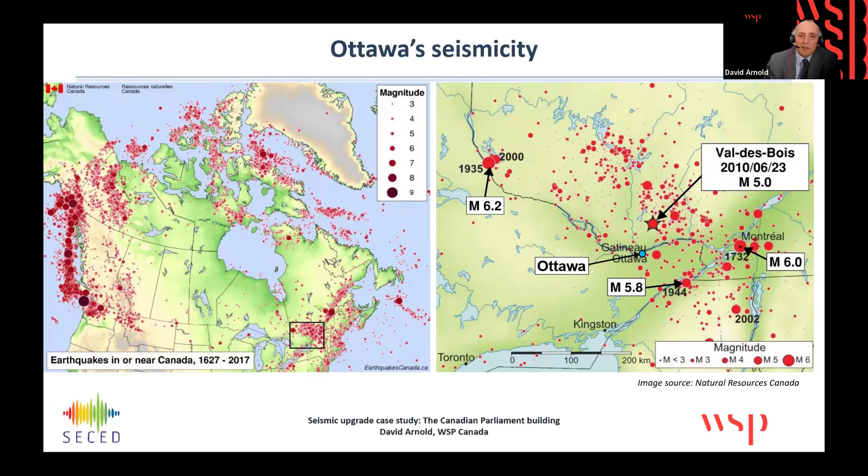Beginning with the seismicity of the area, in Eastern Canada the seismic hazard is relatively modest, particularly in comparison to the seismic hazard faced in Western Canada. However, it's certainly not negligible, and the Ottawa region does have a history of magnitude 5 type events, along with some less common magnitude 6s. What that results in for a short period, unreinforced masonry building such as the Canadian Parliament, would be a design base shear of approximately 39% of its weight.

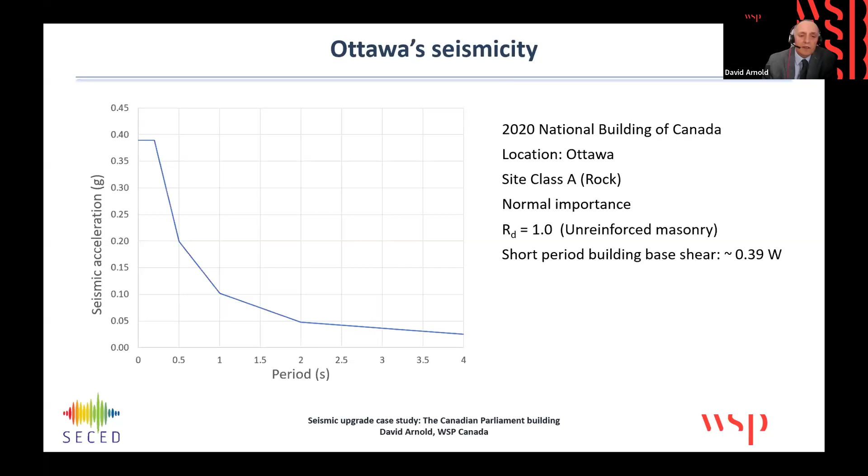We actually had a small reminder about 15 years ago that earthquakes can affect our region's infrastructure. These photos were taken after the nearby Val-des-Bois earthquake of 2010.

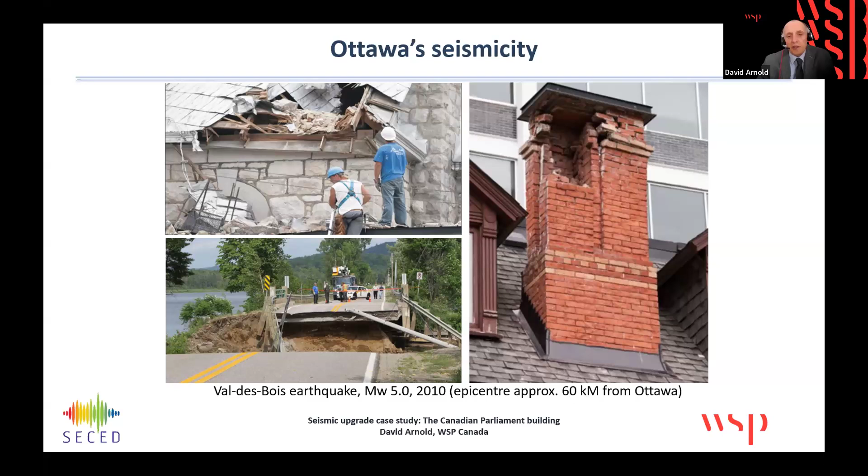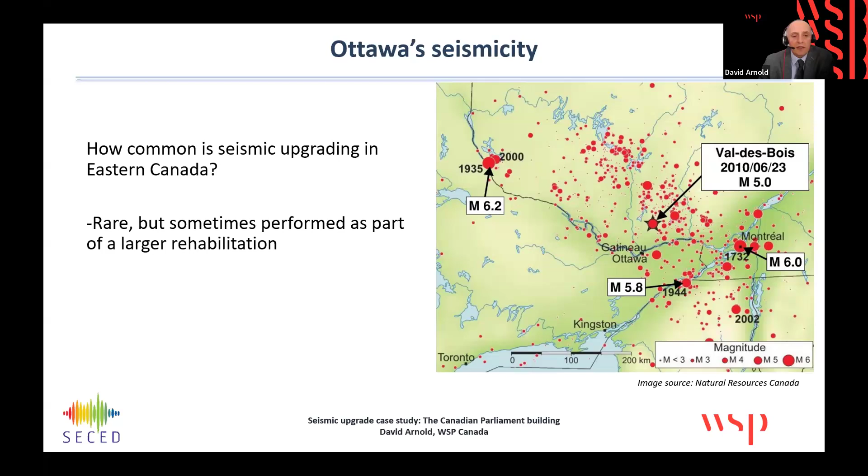So with that said, how common is seismic upgrading in Eastern Canada? Well, it's actually relatively rare and seldom performed outside the context of a larger rehabilitation. And that is also the context for the Canadian Parliament seismic upgrade, which is just one part of a much bigger rehabilitation program.

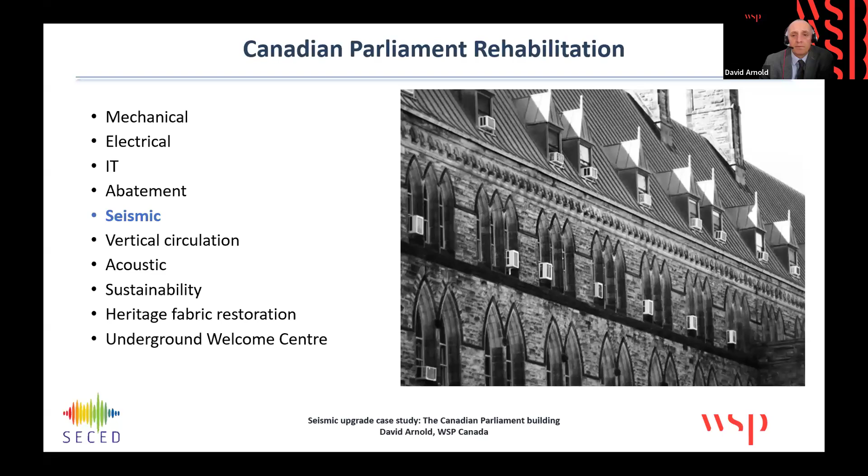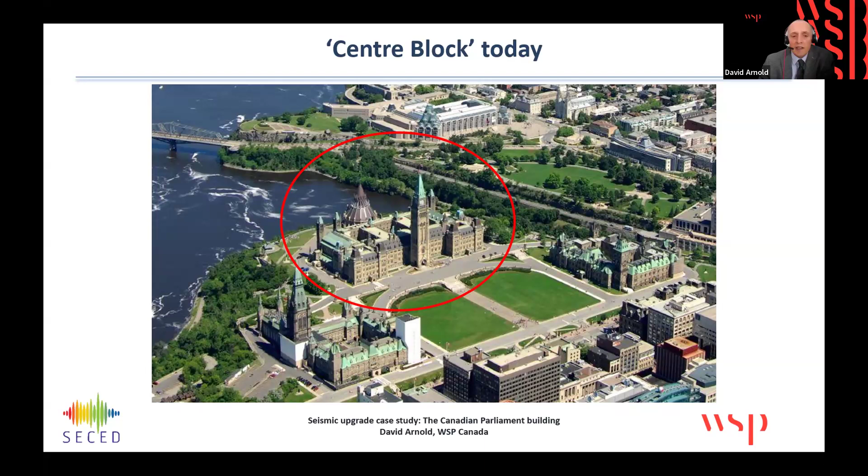Moving on to the building itself, here it is. This is the Canadian Parliament building. It's commonly known as Centre Block, and it's located on Parliament Hill in Ottawa, occupying a very prominent position overlooking the Ottawa River.

It's a majestic building, and it's also a very large building. The length of its south facade, shown here, is approximately 150 meters in the east-west direction, and the building is approximately 75 meters in the north-south direction. The tall tower that you see on the south facade here is known as the Peace Tower, and it's approximately 90 meters tall.

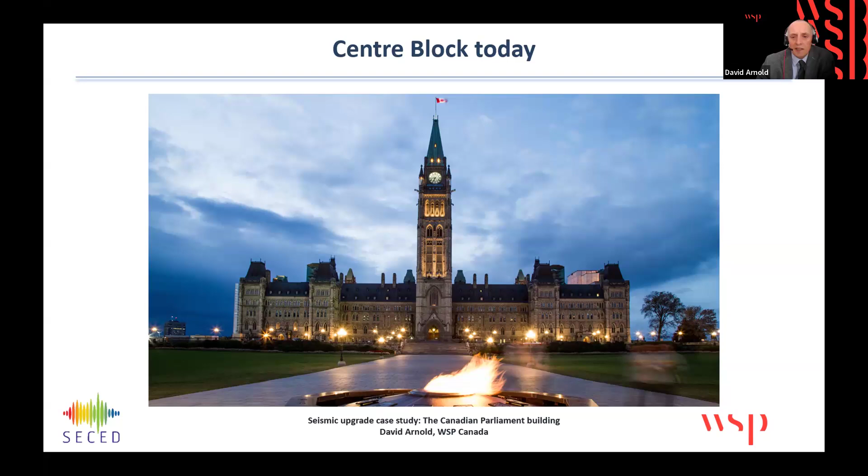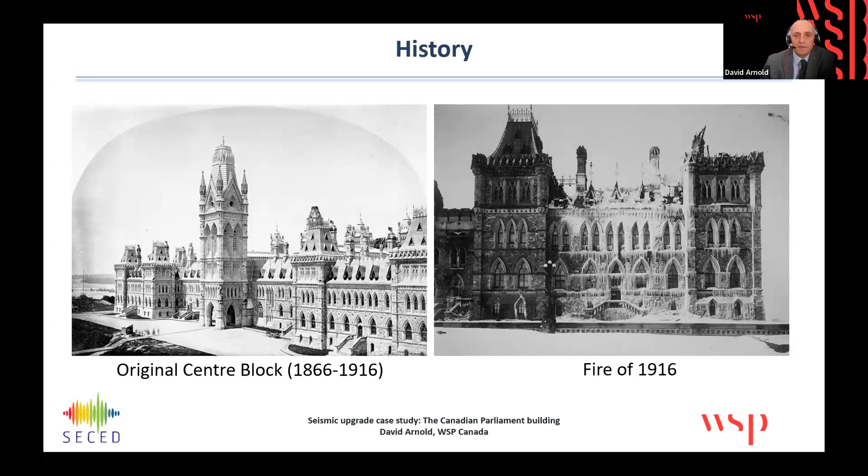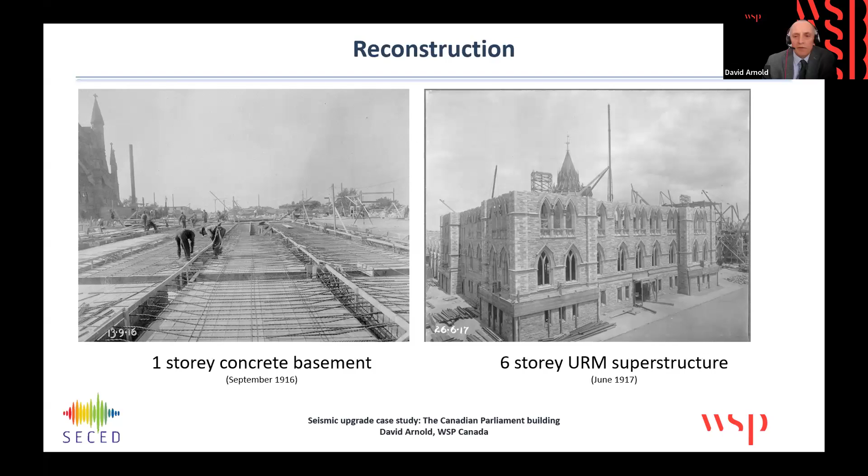Above grade, the building's six-story superstructure was constructed with unreinforced masonry. The superstructure's floors used hollow terracotta tiles that form a flat arch spanning between embedded steel beams. There are tie rods, and you can see a tie rod in the photograph there that is built into the mortar joints between the terracotta tiles. One of the primary motivators for selecting this type of floor would have been its excellent fire resistance, which would have been front of mind during Centre Block's reconstruction.

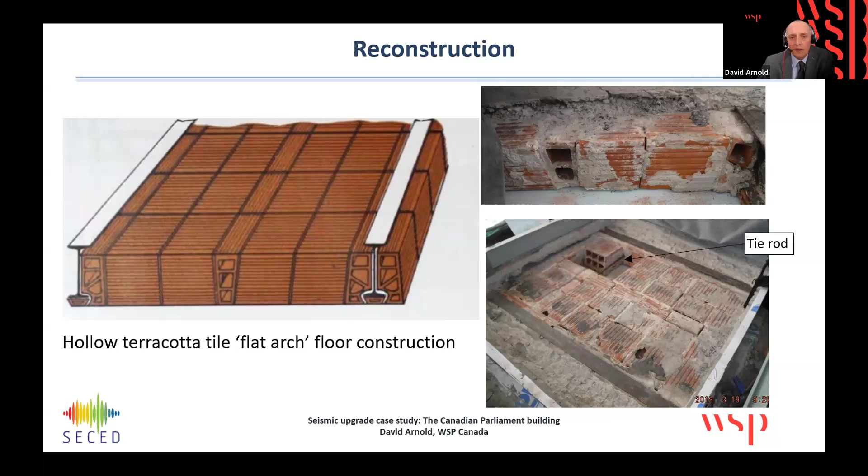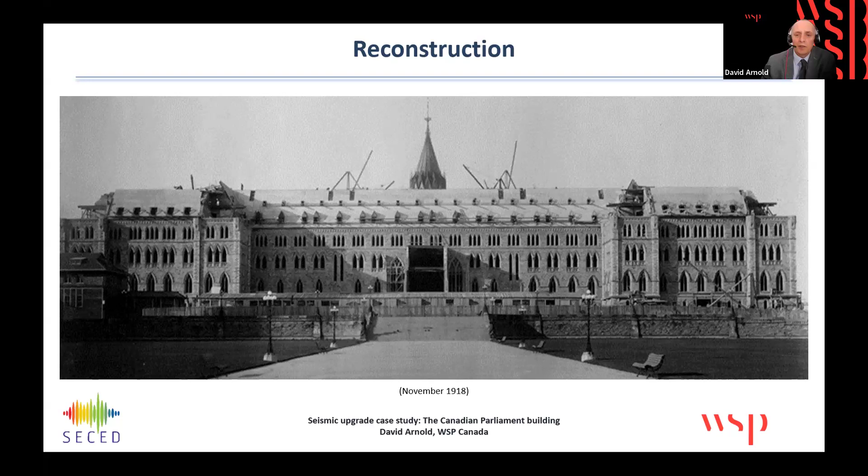From the historic photos, we can see that Centre Block's reconstruction was really quite rapid, with the majority of the structure complete by about the end of 1918. That's only 3 years after the fire. Completion of the interior finishes followed along after this, as did the Peace Tower construction, which was finally completed in 1925. You can see in this photo that the Peace Tower was constructed with plain concrete with an exterior veneer of sandstone masonry.

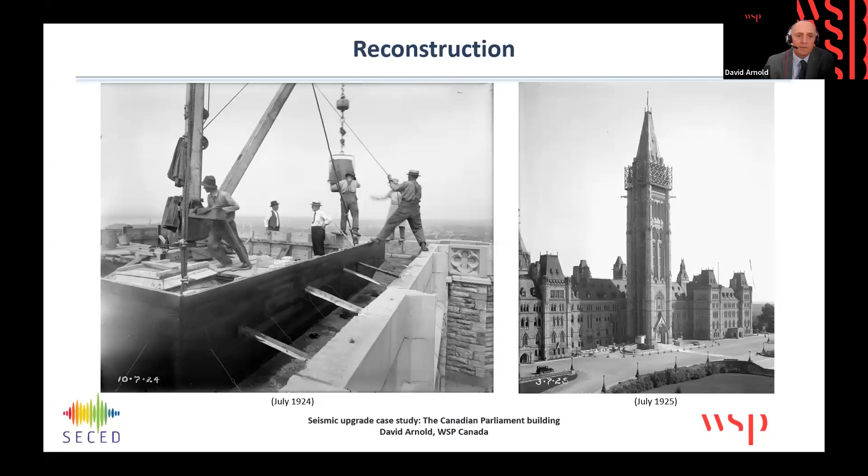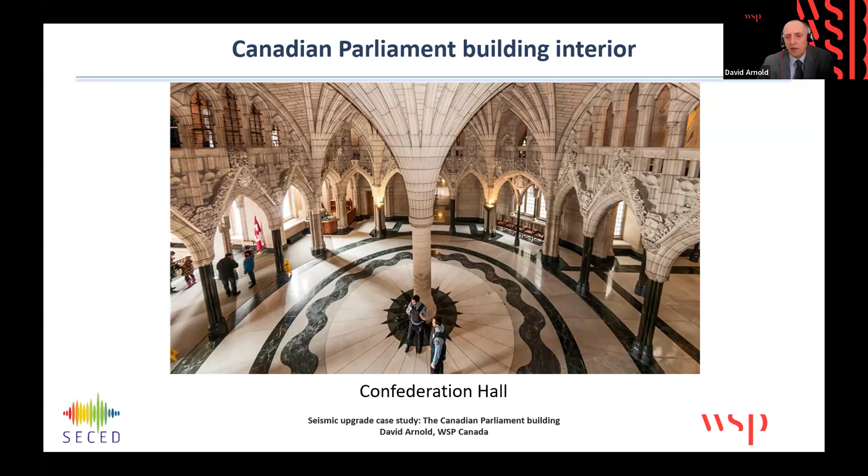Inside Centre Block, its interior finishes are highly decorative. It has some spaces with ornate vaulted stone ceilings. This example is a room immediately behind the Peace Tower, known as Confederation Hall. And leading from Confederation Hall to the Library of Parliament beyond is the Hall of Honour.

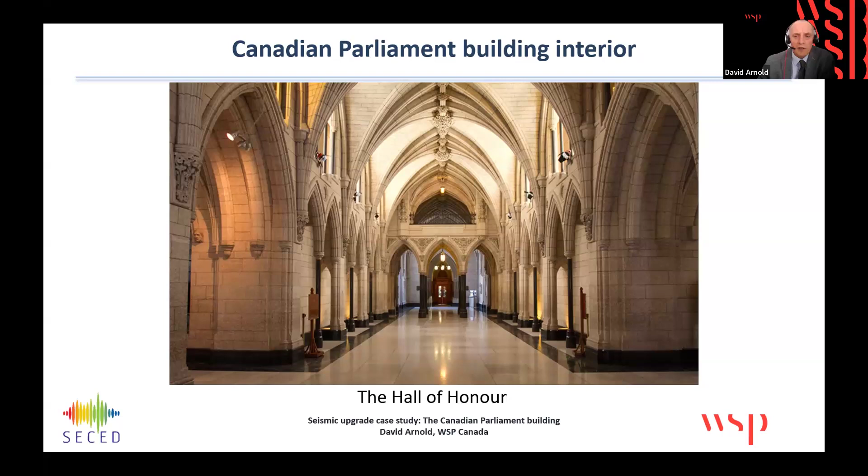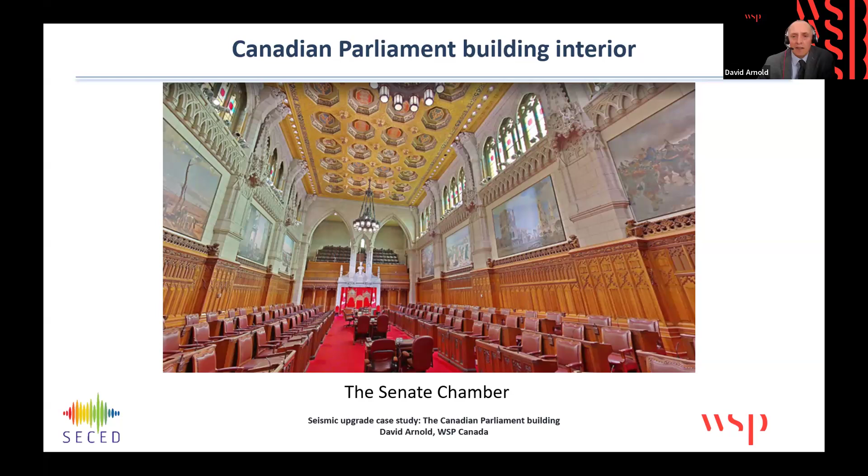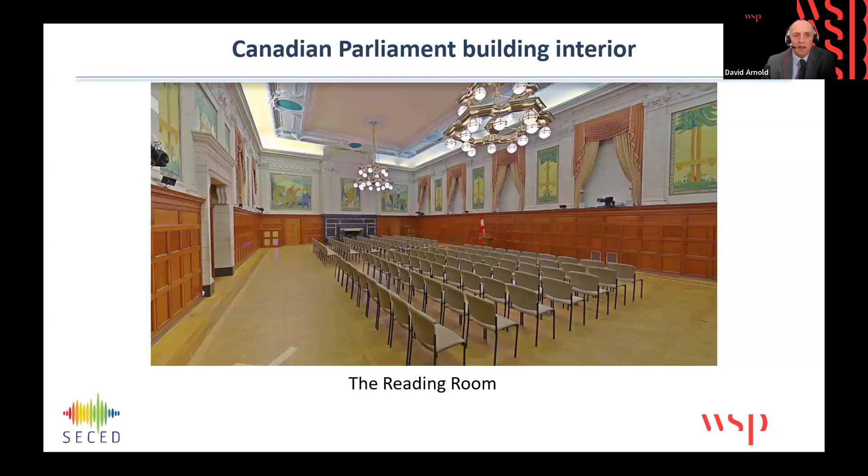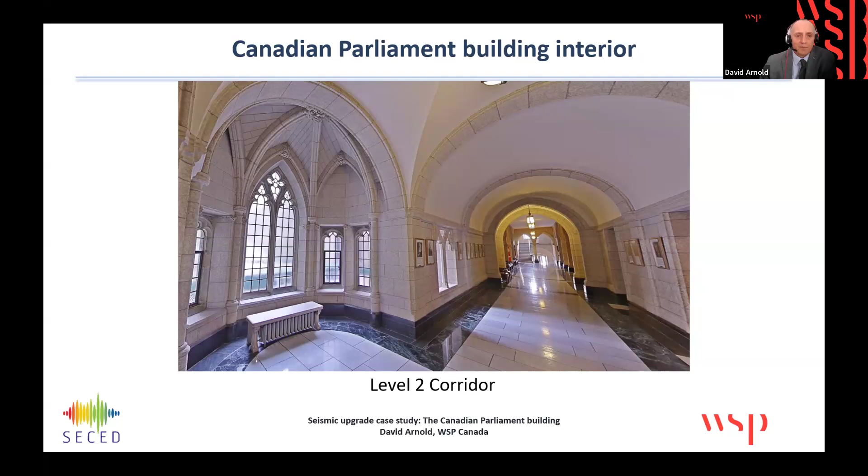In Centre Block's lower levels in particular, the walls are typically lined with a decorative withe of limestone. This is a level 2 corridor, and you can see the marble floors. This is also on level 2, the lobby outside the Senate chamber. It has a beautiful skylight structure, providing natural light to the space below.

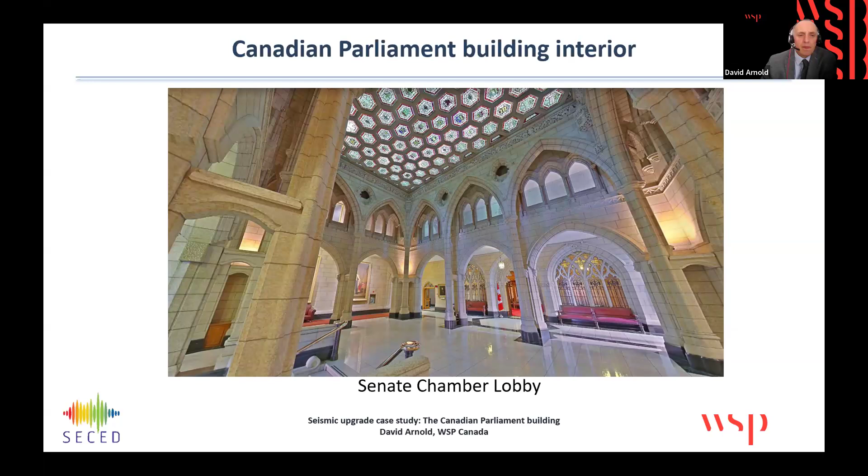So what are the key seismic load path challenges for the building? Well, firstly, the building's unreinforced masonry walls have been assessed to meet less than 30% of code, that's the National Building Code of Canada. In addition, the building's hollow terracotta tile floors do not really provide a rational horizontal seismic load path due to their poor connection to the building's walls. The building also contains many heavy non-structural components that could pose a significant life safety risk in a seismic event, like those vaulted stone and suspended plaster ceilings that I showed.

It also has 4 towers. I'll show you some slides of those later in the presentation. 4 towers at the rear of the building that have inadequate lateral strength, as does the Peace Tower on the south facade.

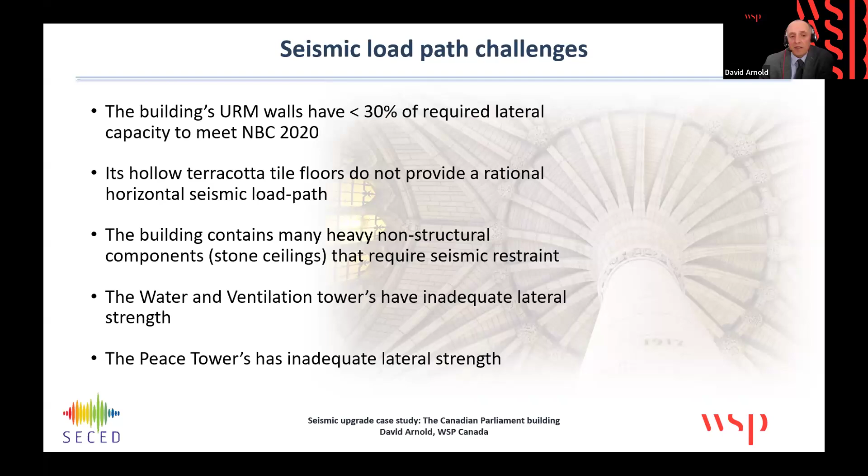So to address these deficiencies, the key seismic upgrade measures we've decided on are: number one, implementation of a basement level seismic isolation system; strengthening of the building's hollow terracotta tile floor diaphragms with a thin UHPC, that's ultra high performance concrete, topping; strengthening of those towers, the water and ventilation towers, with an interior lamination of concrete; and internal strengthening of the Peace Tower's piers and spandrels with post-tensioned rods. So my next few slides, I'll speak to each of these upgrade measures individually.

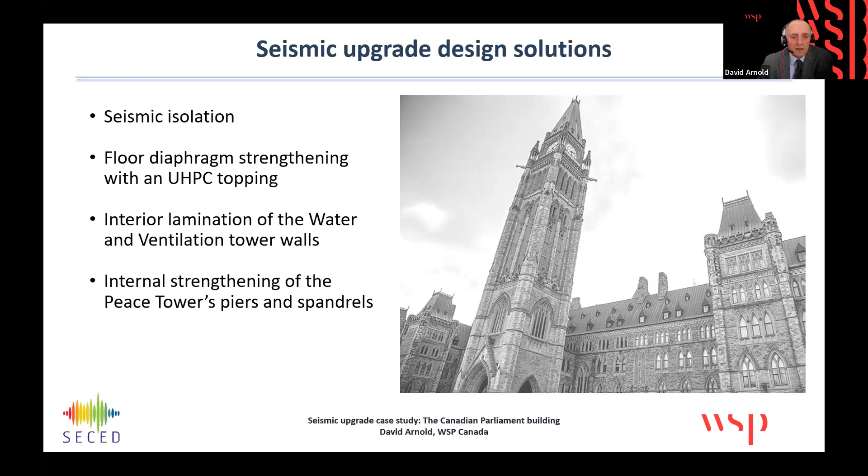So starting with the seismic isolation. Although seismic isolation has been used many times before to protect heritage masonry buildings, as far as we know, this might be one of the first examples of its application in a moderate seismic zone. And that's likely because isolation is often considered, at least anecdotally, to be quite expensive to implement relative to the benefit that is received in a moderate seismic zone.

However, we've found that not to be true for our building. What we've found is that with seismic isolation, we get beyond a critical tipping point for our building where a large amount of the work we'd otherwise need to do is avoided. In particular, we avoid the need to strengthen the building's walls, and this is particularly advantageous given the difficulty of working around the building's heritage finishes.

You can also see why isolation is so effective by examining the site's seismic design spectrum. It has a very rapid reduction in seismic force with increasing period. This is actually a fairly common characteristic of many moderate seismic zone spectra, particularly at rock sites, which makes them quite well suited to seismic isolation, since the opportunity for force reduction with a shift in period, which is effectively what implementing a seismic isolation system does, is very large.

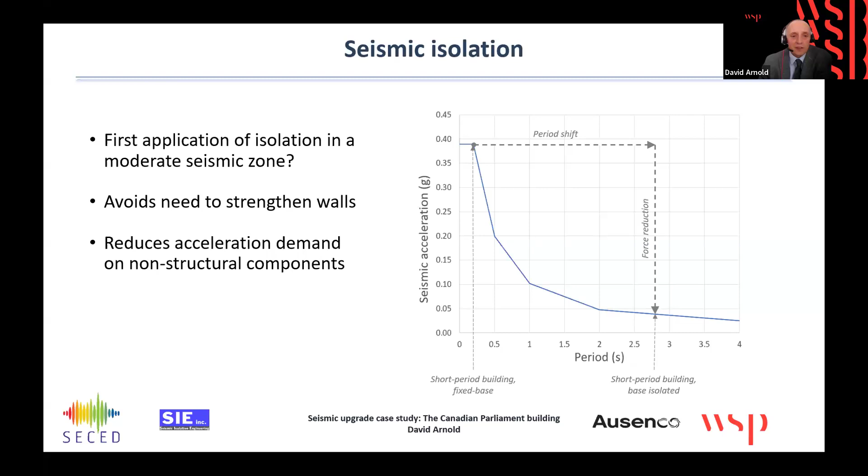So here's a summary of what our isolation system will comprise. We'll need approximately 580 bearings, and they'll be a combination of natural rubber, lead rubber, and flat sliding bearings. The diameters will range from approximately 575 to 775 millimeters, and their height will be quite compact at only 350 millimeters. This will give us a maximum system shear of about 3.3% of the building weight, which is a huge reduction from our fixed base building starting point at 39%. And this max system shear is expected to occur at a max displacement of 95 millimeters.

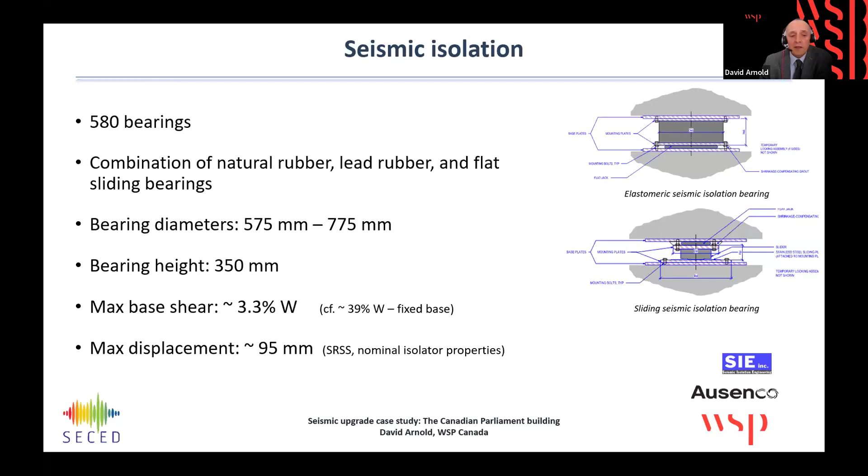So this is really quite a unique isolation system design, particularly when compared to the systems used in high seismic zones. Specifically, the max shear of 3.3% W is a very low shear. Also, the maximum expected displacement is quite low as well. So what a system like this requires is a very low post-yield stiffness, sometimes called the second slope stiffness, to achieve that optimal force reduction, as well as very careful selection of the characteristic strength, which is akin to the sort of yield strength of the system.

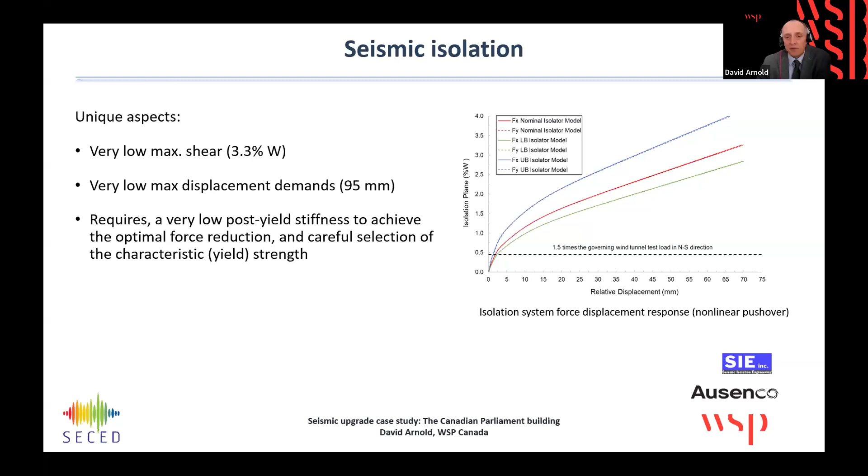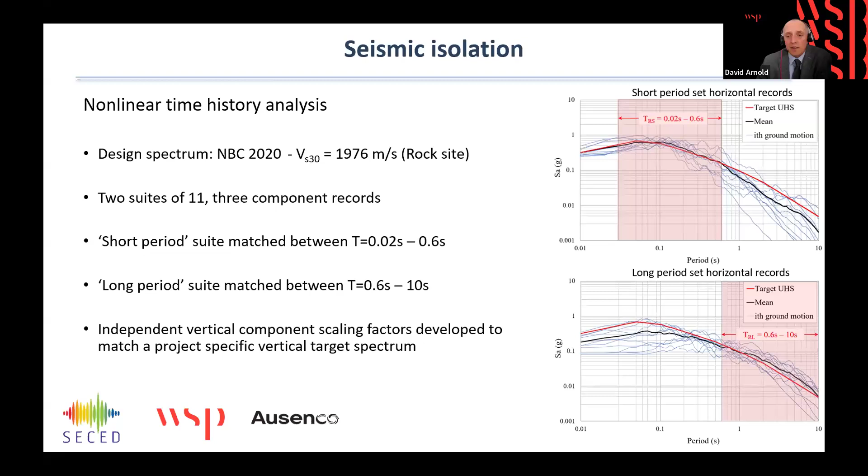The verification of the system performance involved performing nonlinear time history analysis, which is required by the Canadian code. We've been using 2 suites of ground motions with 11 records in each suite, where one suite has been scaled to match the short period range of our design spectrum and the other the long period range.

Since we've invested all this effort in the nonlinear time history analysis, we've also been using the results of that analysis to derive floor spectra to help inform the non-structural component seismic restraint design.

It is a very big reduction in the horizontal accelerations relative to the fixed base condition, which is very beneficial for reducing the amount of work needed for seismic restraint of all those heavy components. It's worth noting, though, seismic isolation doesn't reduce vertical accelerations, and that is a key consideration for a lot of suspended elements.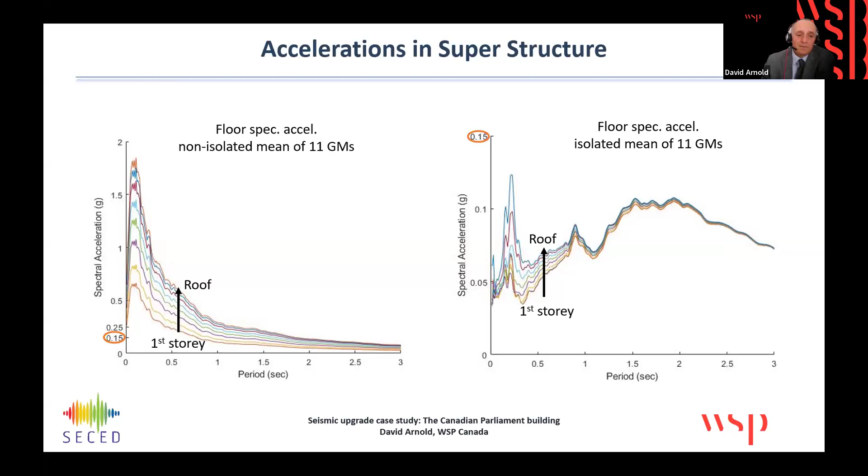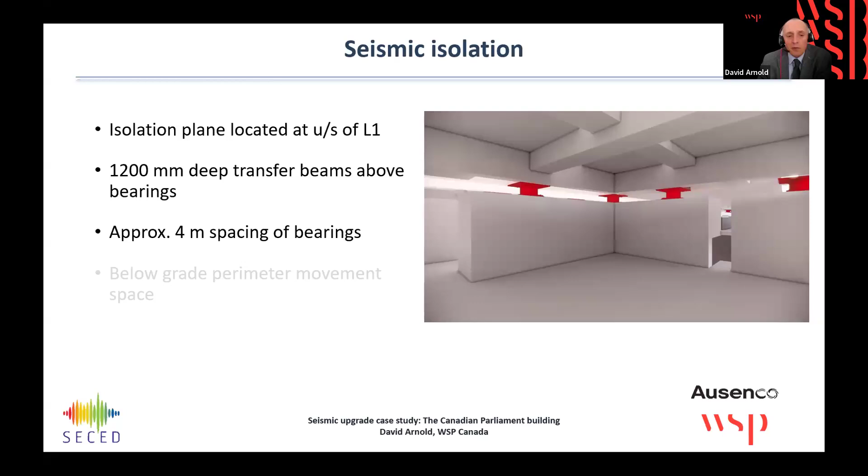With regard to how we're going to implement the isolation system, the bearings will be located in the basement space at the underside of level 1, just below the exterior grade level. We're constructing 1200 millimeter deep transfer beams above the bearings, which will permit a bearing spacing of approximately 4 meters on center.

Since our isolation plane is below grade, we need a perimeter movement space around the building, sometimes referred to as a seismic moat or rattle space, which will be hidden below the exterior landscaping. A unique consideration for our project, since we're in a cold climate, is to make sure the detailing of this perimeter movement joint minimizes any impedance that snow or ice might impose.

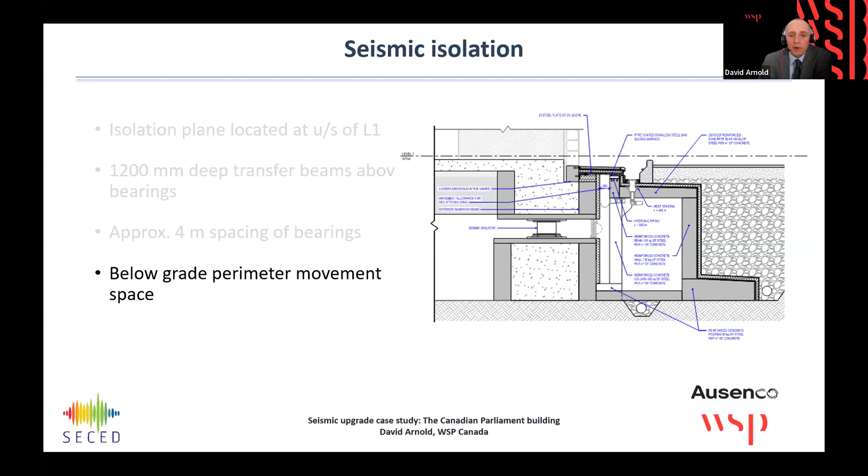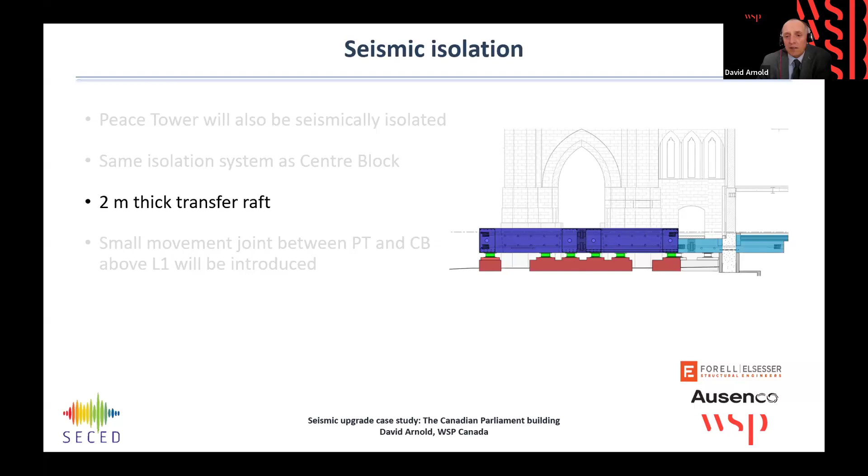We also intend to isolate the Peace Tower on the same system as the main building. That will require a 2-meter thick transfer raft to be constructed around the tower's existing piers. That raft will then be connected back into the main building's level 1 floor diaphragm.

Also, since we have a different dynamic response between the Peace Tower and Center Block, we will need to introduce a small movement joint above the isolation plane between the tower and the main building to relieve the stresses that would otherwise be induced.

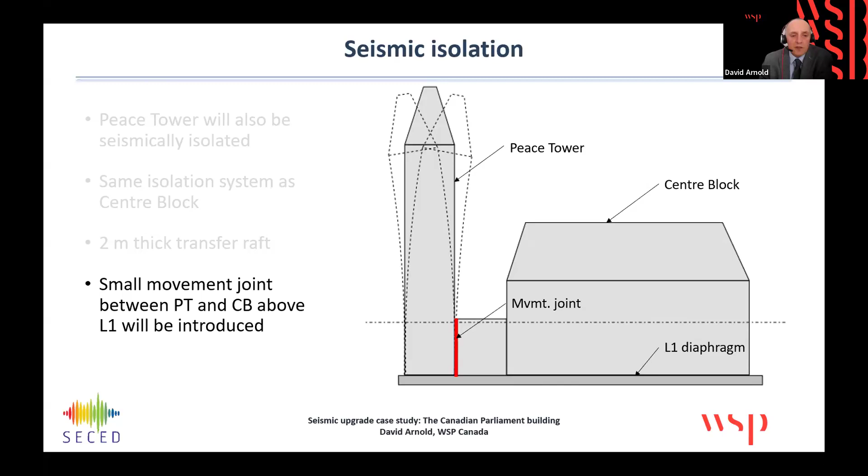Moving on to the seismic strengthening of Center Block's hollow terracotta tile floor diaphragms, we're going to remove the existing low-strength cementitious fill that currently overlies the terracotta tiles and replace it with a 60mm thick ultra-high performance concrete topping. The UHPC topping will be connected to the building's masonry walls with drilled and epoxied rebar dowels.

It is quite a thin topping. We don't have the luxury of installing a really thick topping because we don't want to interfere with all the existing finishes. But we do think it's sufficient, and in large that is because of the reduced diaphragm demands afforded by the isolation system.

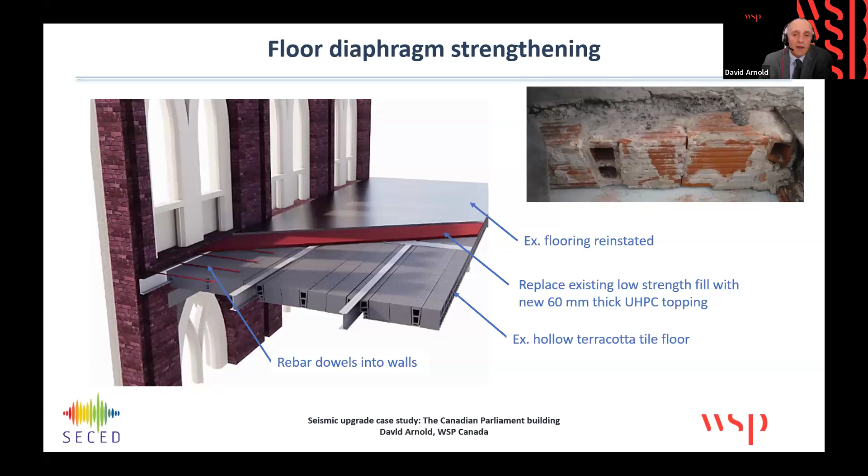We've actually been fortunate to have the chance to experimentally validate the effectiveness of this upgrade approach with a test program conducted at the National Research Council. We tested both the existing condition and two different upgrade strategies, one using the UHPC topping and the other using steel cross bracing positioned below the floor.

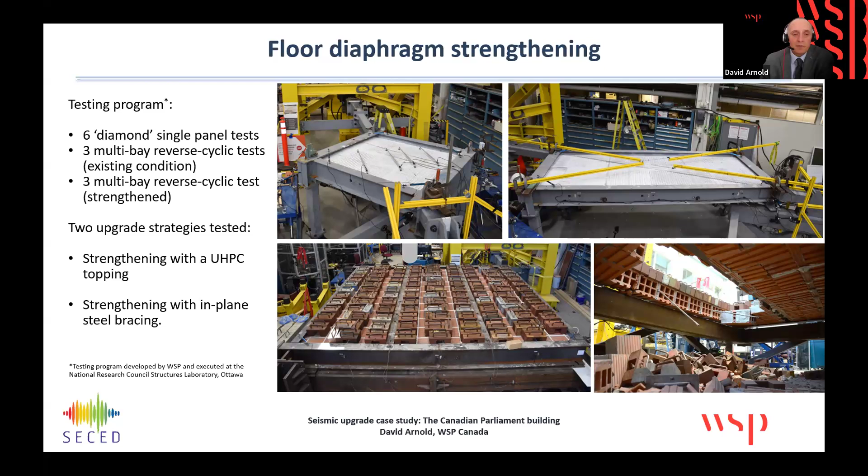What we found was that whilst both approaches do provide strength and stiffness enhancement, the underfloor steel cross bracing did require some initial deformation and damage to the terracotta tiles before it could activate, whereas the UHPC topping provided an immediate strength and stiffness enhancement, primarily due to its really excellent bond to the underlying terracotta.

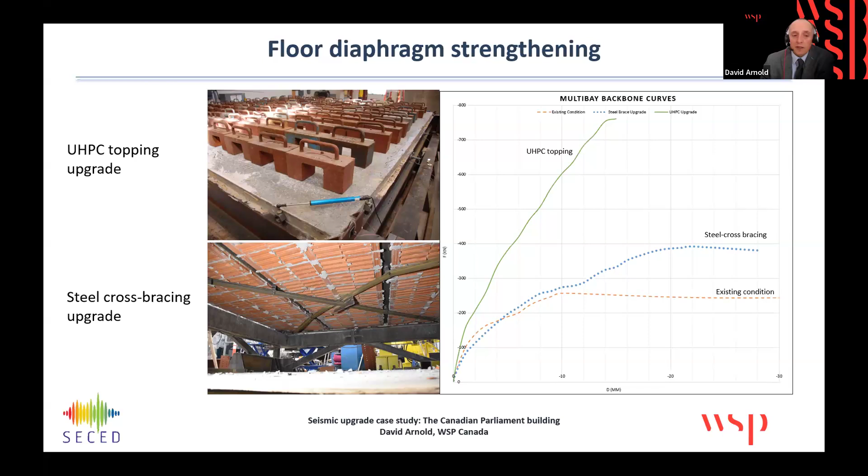The main issue being that these large macro architectural elements impose quite a high local demand on the building, and unreinforced masonry is not particularly sympathetic to high local demands. The issue is compounded by the fact that the interior of these towers are essentially just continuous vertical voids that don't have floor slabs inside the towers, so their connection to the surrounding building is quite poor.

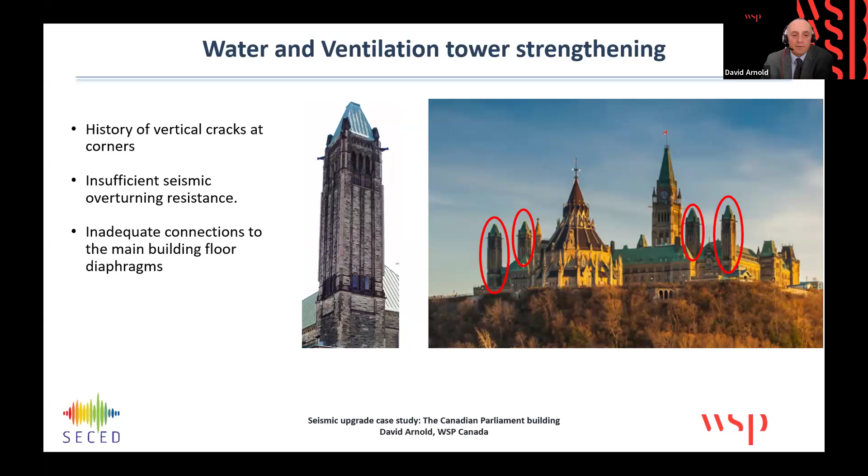So our upgrade approach solution for these towers is to create essentially a rectangular concrete tube inside each tower by lining all 4 sides of their interiors with a thick lamination of reinforced concrete, which we can then in turn connect to our surrounding floor diaphragms with drag bars.

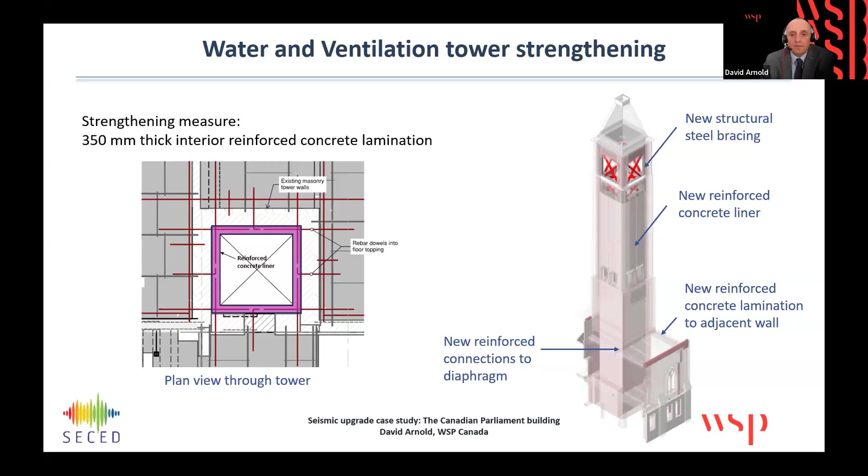So finishing up with the Peace Tower, although the Peace Tower will be base isolated on the same system as the main building, due to its longer fundamental period, which is about a second compared to center block, which is about 0.3 seconds, unfortunately the force reduction we achieve by base isolating the Peace Tower is a lot less. With isolation, we reduce its base shear by about 50% relative to the fixed base condition. However, that's not quite enough to get us to 100% of code, so we also intend to reinforce its piers and spandrels with drilled and post-tensioned steel bars.

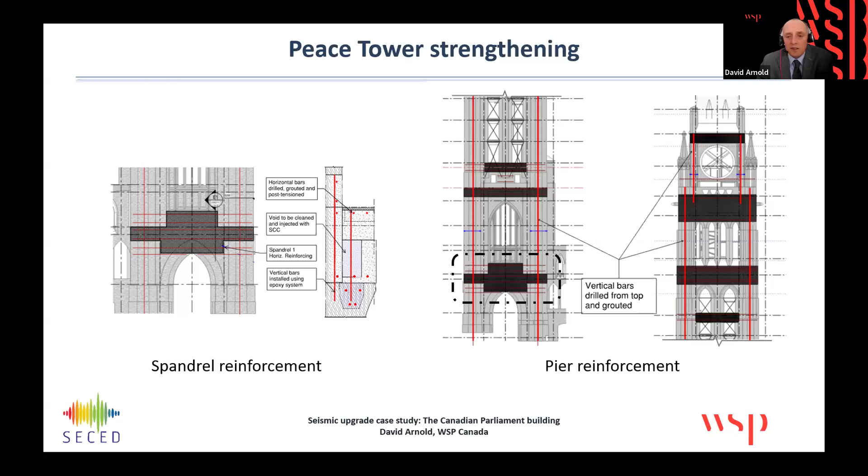So to wrap things up, what are some key takeaways from our experience so far with this project? Starting with seismic isolation in a moderate seismic zone, we do believe it can be a cost-effective seismic upgrade solution for short period buildings in moderate seismic zones, particularly if there is a strong desire to reduce superstructure intervention. However, its optimized application does require a system with a very low post-yield stiffness. Also, since the targeted maximum system shear will be quite low, extra attention needs to be paid to details that might inadvertently increase the system breakaway force.

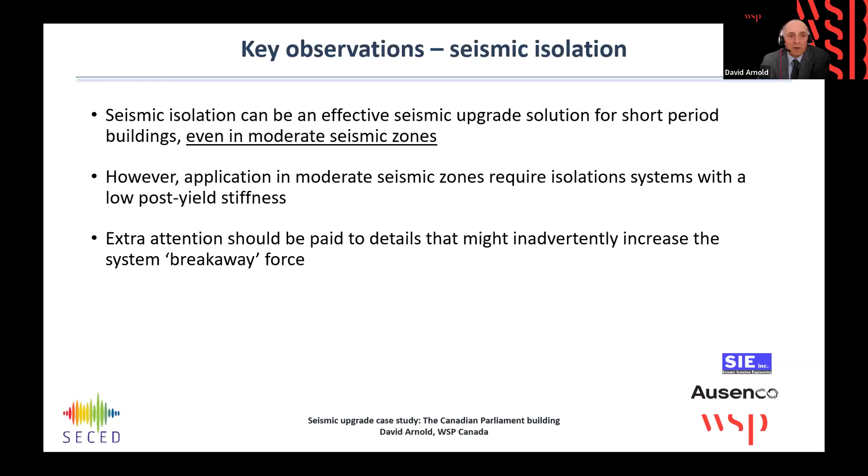Things we've learned about the hollow terracotta tile floors: our experimental testing has demonstrated that it's possible to upgrade these floors and retain them in place. And in fact, a relatively modest application of a well-bonded topping connected to the surrounding walls can provide a significant seismic performance enhancement.

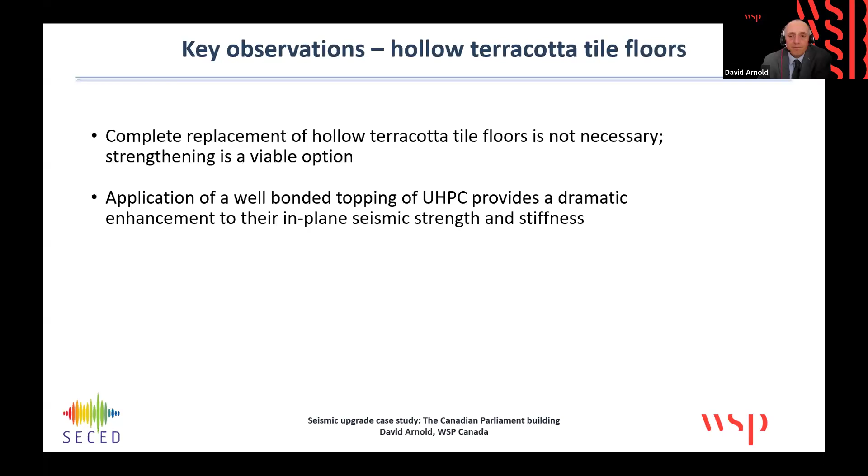All right, well, that's all I have. I hope that was informative and enjoyable for everybody.

Many thanks, Dave. Yeah, thanks a lot. It was so gripping that I couldn't get up to turn on my proper light switch, so you've just got this gloomy lamp here. But yeah, I think we've got a couple of questions coming in, but we will save all the questions to the end, and we'll go straight along with Jared.

I don't think we've got a facility for applause here, but you can imagine folks clapping at home. Yeah, and Jared's modeling for us. Swanan, you were going to say something? Yeah, one note, Damian, sorry. Whenever you are typing questions, can you please also type your role as well with your current role and affiliation? That would be great. Yep, thanks, Swanan. Swanan's put some instructions in the chat there to follow when dropping your questions in. Okay, so I think Jared, over to you.

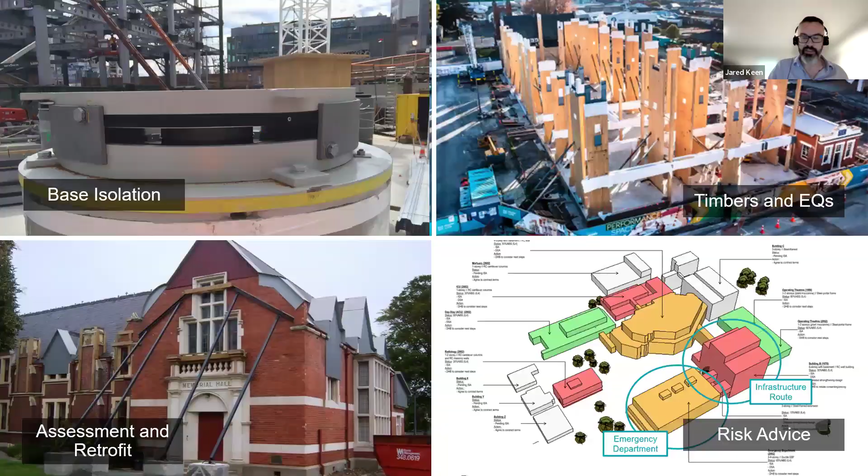Just so you know who I am, my name's Jared from a company called Beca. We're based out of New Zealand, but have a presence throughout Australia and Southeast Asia. And as you might imagine, for a company based in New Zealand, we spend a large proportion of our time dealing with earthquakes and their consequences. I spent the earlier half of my career over in Europe, working on a number of projects in the shakier parts of Europe. And then I moved back to New Zealand after the Christchurch earthquake, where I've been involved in various different projects, particularly in base isolation space, in timber and earthquake engineering space. And then a lot of my time has been spent on seismic assessment and retrofitted buildings. These days, it's probably well over half my time is on that space.

And as a result, I spend a great deal of my time moving from those assessment works to talking with clients about seismic risk advice and how they can manage their portfolios to reduce seismic risk overall. And that's kind of what leads into this talk - the experiences with clients and how they have been dealing with this.

So this presentation could be seen as a little bit of what happens when a whole country starts talking about earthquakes, which is really the space that New Zealand's been in for the past almost decade and a half now.

So I'll give just a very brief overview of seismic assessment in New Zealand, a couple of the bits that are very relevant for those discussions that have been happening. And then I'll talk through both the legislative and the market responses to it - how the public and engineers have been engaging with each other on it, and in particular how we've been dealing with some of the changes in engineering knowledge that have happened over this process.

So New Zealand's seismic journey is reasonably comparable to other jurisdictions that have large earthquakes. We've been on a gradually improving course in terms of seismic design.

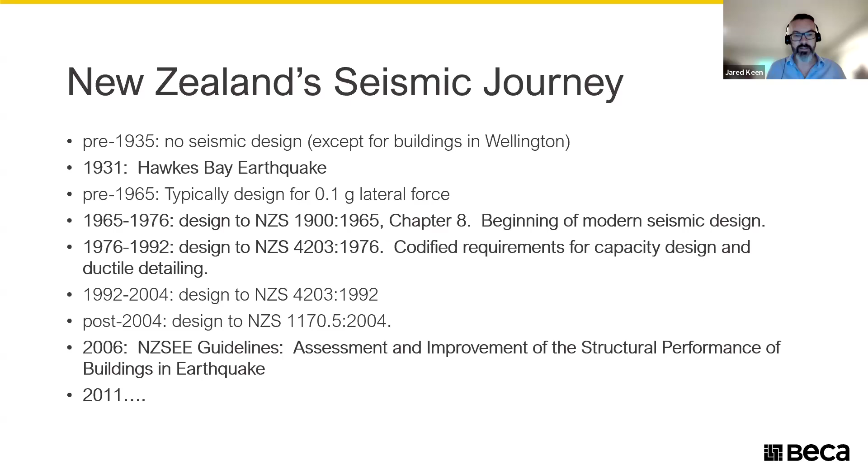And then in 2011, we had our first big game changer, which was the Christchurch earthquake. This was a large event - 185 people lost their lives, with significant damage through the central city in particular.

And at this stage now, so 10 years on, Christchurch is where I'm based, and large portions of our central city have now been rebuilt. It looks very different to what it once did.

This event, as you might imagine, significantly raised public awareness of earthquakes, not just in the area, but throughout the whole country. It very rapidly came to the fore in much the same way as people now understand that pandemics really happen. People in Christchurch and in New Zealand have moved from a position where earthquakes are a theoretical thing to a very real part of what can happen in their lives.

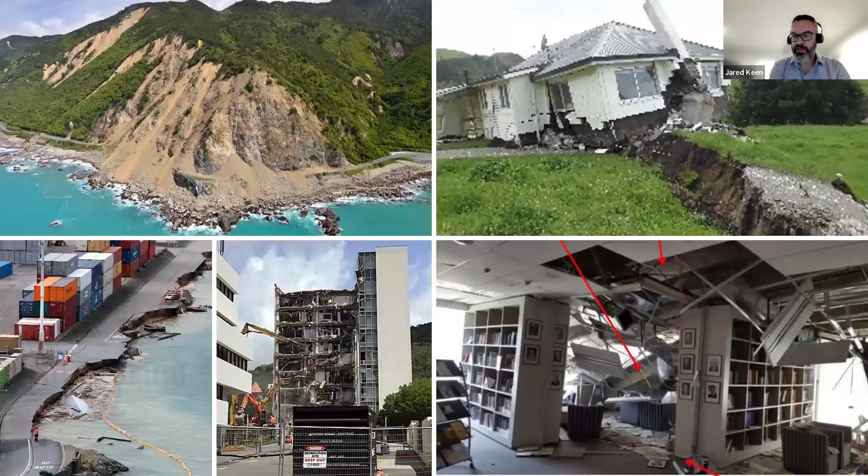Now, if that wasn't enough, 5 years after that, we had another bigger earthquake. This was in Kaikoura, in between Christchurch and Wellington, so in between our second and third largest cities. The two images at the top are representative of what happened around the epicenter, which was a great deal of land damage and infrastructure damage. Thankfully, only 2 lives lost in this one because it was in quite a rural location.

But a lot of the earthquake force was projected northwards towards Wellington, and the images at the bottom are from the Wellington CBD. There were no lives lost in Wellington, fortunately, despite some of those images, in particular the one on the right, which is the collapse of a precast panel inside a building. But there was a lot of building and infrastructure damage.

And so this coming quite hot on the heels of the Christchurch earthquake has really ramped up the public awareness that not only can earthquakes happen, they are going to happen, and they're going to happen again.

So the ramifications of that in a general sense for New Zealand have been, first and foremost, that the public now considers earthquakes to be a priority for them when they start thinking about buildings, particularly commercial buildings. And that flows through to expectations of tenants, of corporations who are representing those tenants, of building owners, and so forth.

Our government has responded to that with legislation, which I'll get on to momentarily. And the engineering community has then further responded with a lot of research that's been going on and also additional guidance.

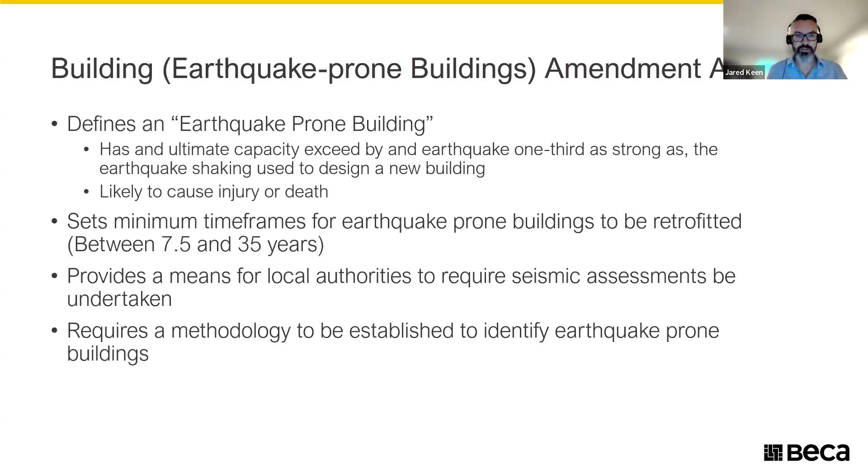Now, the methodology that was developed, a year after the Act, is what we call our seismic assessment guidelines, or often just the guidelines. You can think of these as very comparable to our new building standards. They're larger probably than our new building standards, with a lot of information in there.

But perhaps the most critical feature of these guidelines is they introduced a term called percentage of new building standard, or %NBS, which has become very widely known throughout New Zealand. It's effectively a scoring system - it scores buildings against the current design standard, the idea being you can use it to identify buildings that are below the 33% threshold, and they are the buildings that are more vulnerable. They're classified as earthquake-prone buildings, and they go through that legislative system.

Importantly, the scoring system that we engineers put together to help evaluate earthquake-prone buildings is a very simple scoring system. It is a single number given to a building, and at the end of this assessment process your building gets a score of, let's say, 60% NBS, and that is a known and recognised score, and that becomes important.

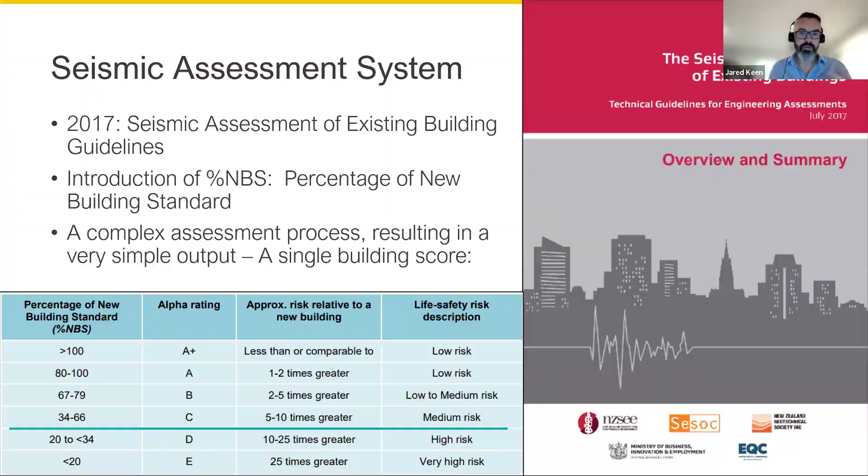So what happened after we released this process in the guidelines? The first thing that happened is what we all hoped and expected - a great deal of the more vulnerable buildings started getting assessed and started getting strengthened.

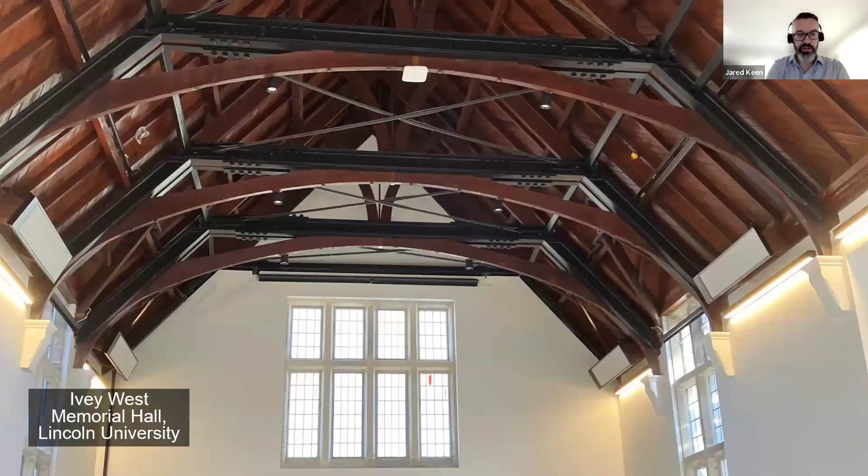There's also been a lot of work on heritage retrofit. As Dave's shown in his presentation, some of these older buildings, the URM buildings, are by far the most vulnerable, and very often get classified as earthquake prone. This is one that was just completed recently down the road from us, the memorial hall at Lincoln University, which had also been quite significantly damaged in the earthquakes.

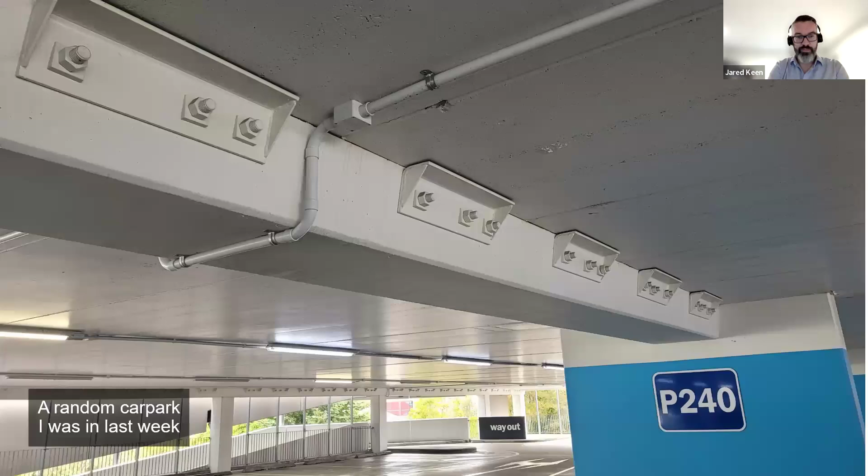And the final example is perhaps the least exciting seismic retrofit project you might see, but one I think is very important - a random car park that I parked in a few days ago. I put it up here because you can walk around Christchurch and most places in New Zealand now, and you will see seismic retrofitting in many buildings, especially older ones. It has become what we hoped it would be, where a large proportion of our buildings have been assessed, and a great deal of those have then been retrofitted where they've been found to have vulnerability. So we're in a situation where we have a lot of this retrofitting happening.

However, there's been a few other things that have happened that are perhaps not quite what we might have predicted, and I think are worth highlighting. So first, buildings got placarded as part of the system. They got effectively a warning sticker put on them if they were earthquake prone. That's been good and bad. It has certainly prompted action on a number of these buildings, but it has left certain buildings that are difficult to retrofit with quite a stigma on them if they have one of these placards.

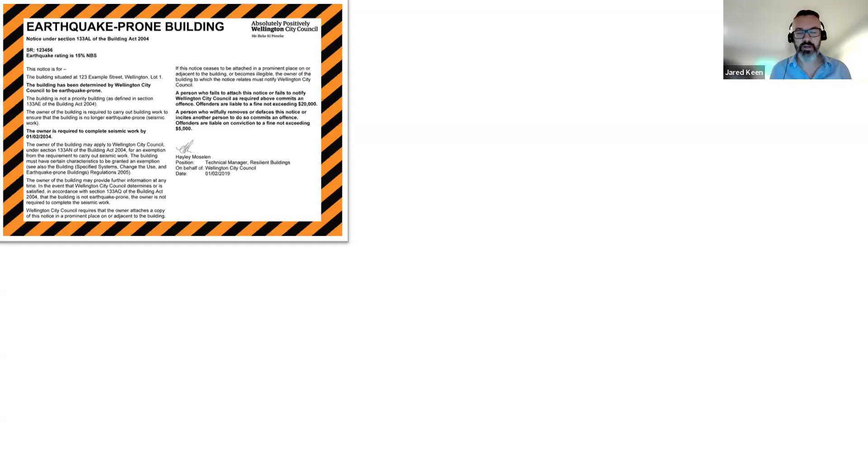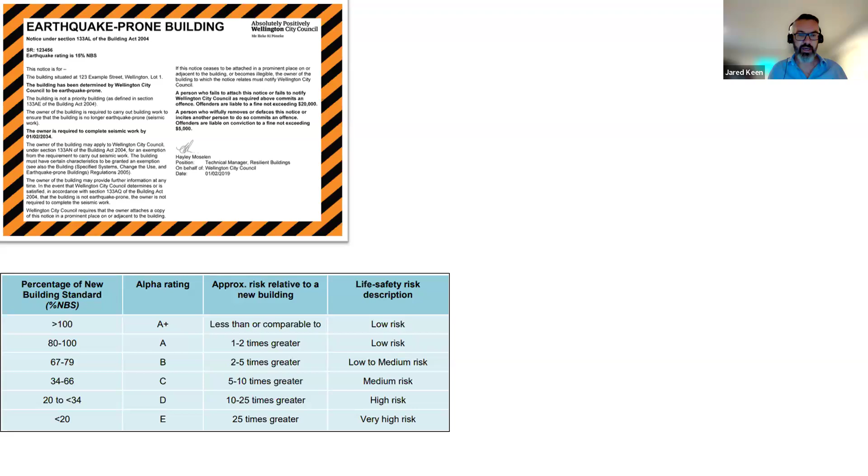The next thing that happened is the scoring system that we pulled together as a useful technical tool to determine these earthquake-prone buildings has really grown legs of its own. This simple scoring system, effectively 0 to 100, has been picked up by non-engineers across the country. I'd say they see it as something akin to a Michelin star system or the star rating on your fridge. It's a very simple number as far as they're concerned. The higher number is better, the lower number is worse.

And the general public has taken this and run with it, with a number of flow-on consequences for how we interact with them and how we deal with our buildings.

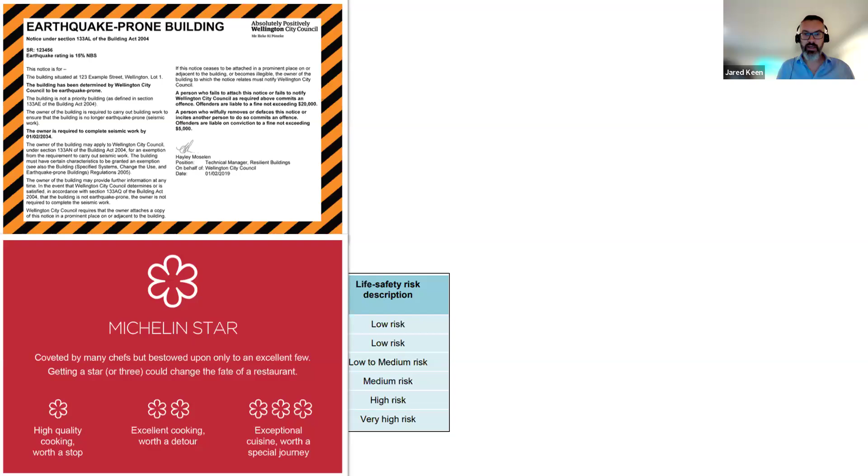The first immediate consequence of this is suddenly there's a huge engagement with structural engineers compared to before. Because when we've presented people with this simple score for their buildings, the first thing they want to know is what does it mean, and tell me more. So structural engineers have spent a great deal more time talking with both the general public, but also with building owners, with those responsible for buildings, with boards and so forth. We now spend a lot more of our time engaging with organizations at the highest level to help them understand their buildings and what they should do about it. And we're often now the first point of call, particularly on existing buildings rather than architects.

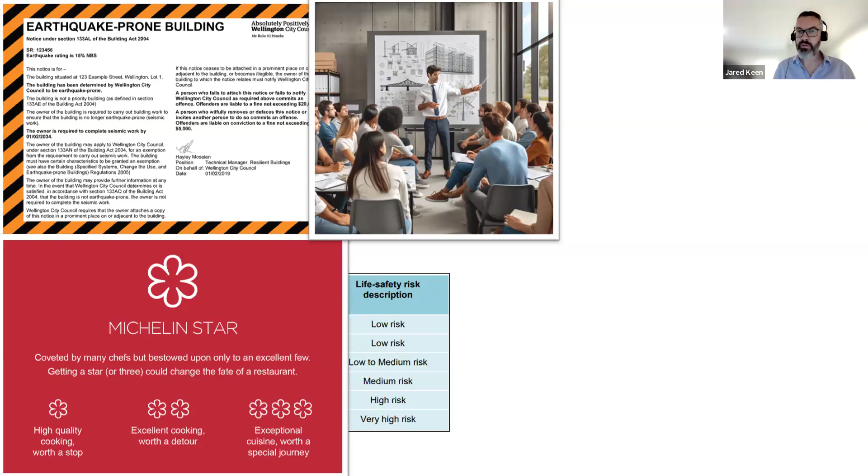Other industries have then started to pick up on this. So the insurance industry, first and foremost—for those who interact with the insurance industry, they are generally speaking very savvy when it comes to risk. They're pretty good at understanding these things, and they have grabbed onto this scoring system in a relatively sophisticated way to help them understand buildings better. That in turn, as it has certain impacts on premiums and so forth, tends to affect the broader market. I would say that interaction with the insurance market, in my view, has been a relatively positive one. It's been providing them better information than they would otherwise be able to get.

Where it's become a little bit more fraught is the interaction with the real estate market. The real estate market has also picked up on this very simple scoring system. But for those who interact with the real estate market, they are not as sophisticated in their understanding of risk. And this very simple scoring system has been used, but it's also, I would say, in some cases been misused. It's certainly been used in cases as a promotional tool.

It has resulted, through tenant demand for buildings that are more robust and more resilient, in strengthening, but the tenancy market and the real estate market tends to drive change at the higher end of that market rather than the lower end. So while we as engineers want to address our most vulnerable buildings, the real estate market and the tenants who can afford to influence it tend to want to occupy the best buildings. That's tended to lead to capital being invested in buildings that are already relatively resilient, becoming more resilient, rather than the more vulnerable buildings being taken to a modest level. So it has enhanced public interaction, but it's come with some caveats and some difficulties as a result.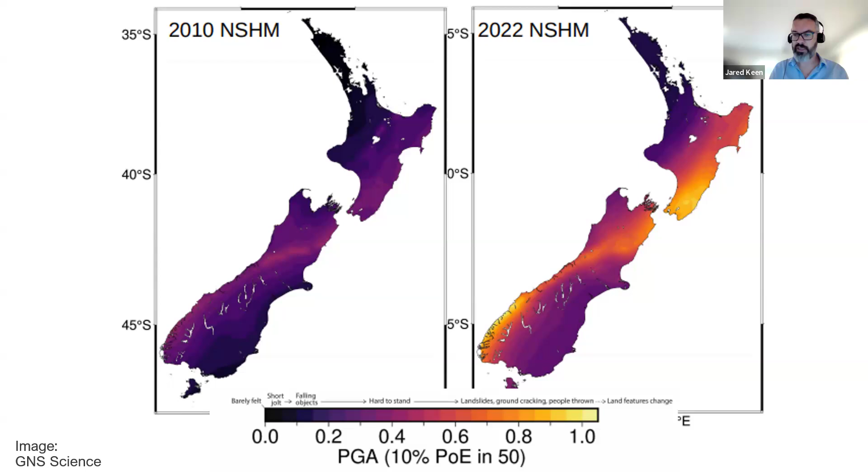So we start to run into this problem when now our legislative requirements are based on the old accelerations, but we know, or the engineers know, because we have this very engaged community, that actually the seismic risk is higher than what was looked at previously. It's a real struggle to work through that and untangle it. It's difficult for engineers to do that, and it's much more difficult for non-technical people to work through that.

There are also a number of engineering changes that have happened, as whenever you get a big earthquake, there's a great body of research that happens. If there's any academics on the call, their entire focus is around determining these areas where engineering is not sufficient, getting better information to us and promoting these engineering changes. But these changes can be difficult to deal with.

So we have a particular issue in New Zealand, which is hollow core flooring. This is a precast concrete flooring, extruded in these kind of long units, and it's mostly unreinforced. In particular, the webs are unreinforced. So it's like maybe perhaps a more modern version of the terracotta floors that David presented. But there are some issues with these floors, and they were used very widely through the 80s and 90s in New Zealand.

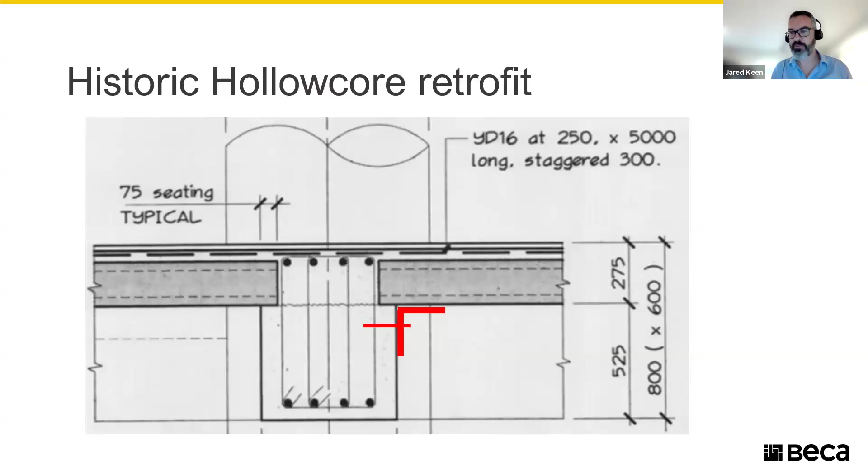There's been some issues known about them since the Northridge earthquake back in the late 90s, I think it was. There's been various retrofits that have happened over time, often little shelf angles that get put on. So the car park example that I had previously had these shelf angles put on.

But what we found is that there were unexpected failures of these flooring systems that occurred, particularly in the Wellington earthquake. And there's been a very large body of research done on these floors. For those who want to know more, the ReCAST Floors Project is the name of that research, a large collaborative effort between the major universities in New Zealand, with government funding, and also some industry partners.

If you have a look for this ReCAST Floors project, you'll find a great deal of information on it. The Structural Engineering Society of New Zealand have published a standalone journal of a couple of hundred pages that effectively captures all this research in one place. There's a number of issues with it.

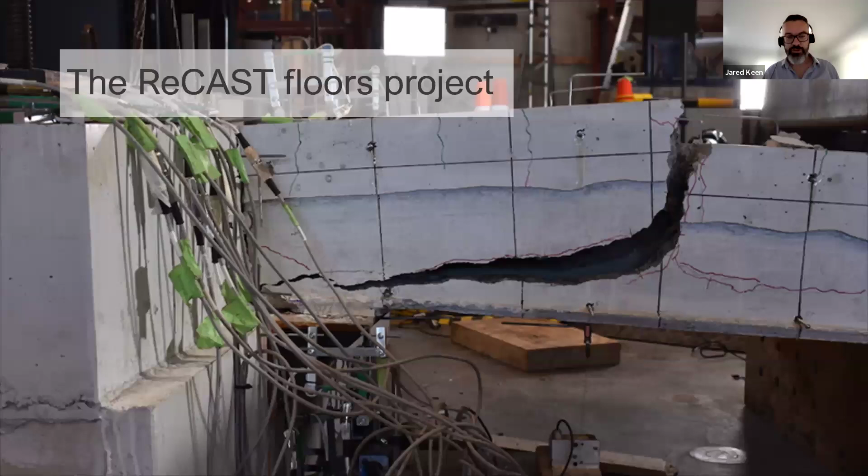One of the biggest issues we have found is what's been termed a negative moment failure, where the floor unit, which you can see horizontally across here, has the beam, on the left here, rotating away from the floor unit, and you get the shear crack forming away from the supports. So this has got one of these shelf angle type supports here, right next to the beam, but the shear crack is happening some distance away.

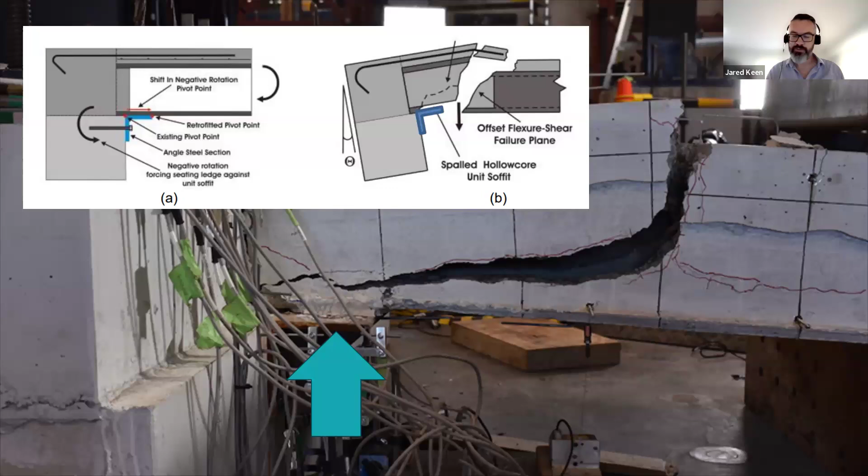What's actually happening is that topping reinforcing is causing that end block to act as a rigid unit. The weak link is actually out beyond that topping reinforcing, so it's causing a loss of gravity support out towards the middle of the unit. A real problem, and these floors are very, very widely used.

As diligent building owners, back in around 2017 when the guidelines were released, they came to us and said, can you assess our building? Tell us what we need to do. We worked through that. There were some weaknesses in those buildings. They said they wanted to achieve an 80% NBS rating, so quite a high rating. We worked through that with them, did a bit of diaphragm strengthening in some localized areas and a few other pieces of work to get it to that point. They were very happy with that and moved on.

Several years later, a tenant came to them who'd been given advice by a real estate agent, saying you need to ask about hollow core floors because there's been changes in hollow core floors. Our client came back to us and said, what's the deal with these hollow core floors? We said, well, by the legislative requirements, actually they're not covered, but yes, there has been this new knowledge that's come out. We can have a look at them for you. We had a look, and we found that on their particular building, in some areas and some levels, as a function of detailing and various other things, there were issues with hollow core.